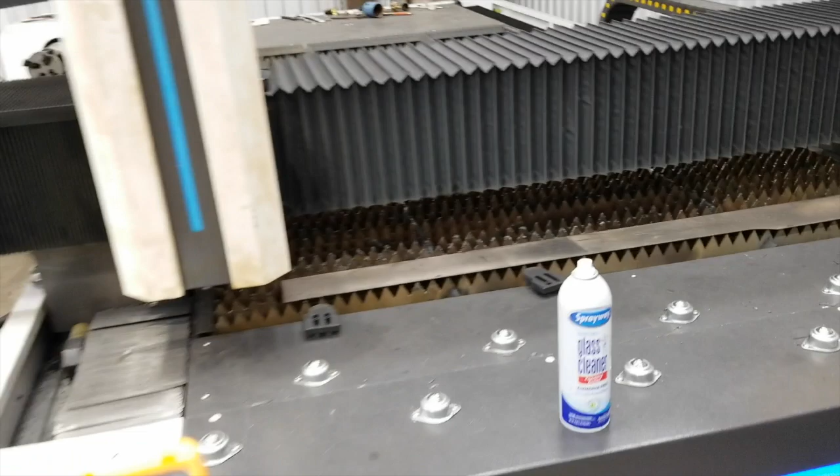All right, so for this part of the video, we're going to walk you through everything about the remote and what the buttons are and what they do and how to use them. For the purposes of this, I'm not doing a screen capture because I don't have screen capture software on this, and I do not want to take a chance on causing any kind of issues.

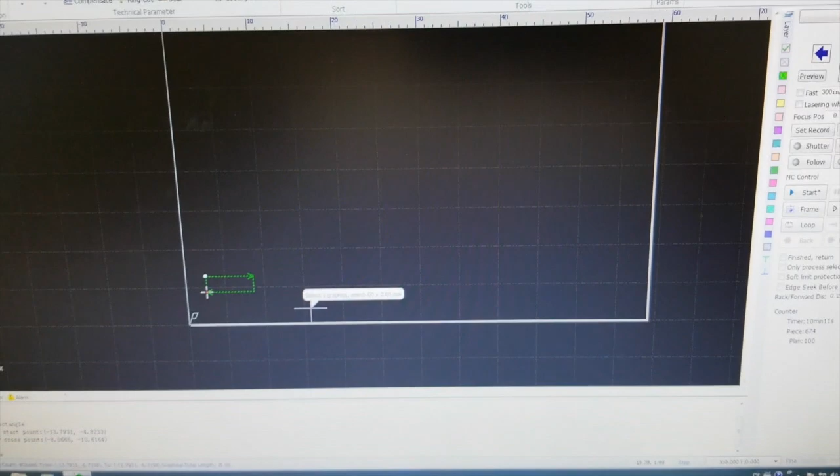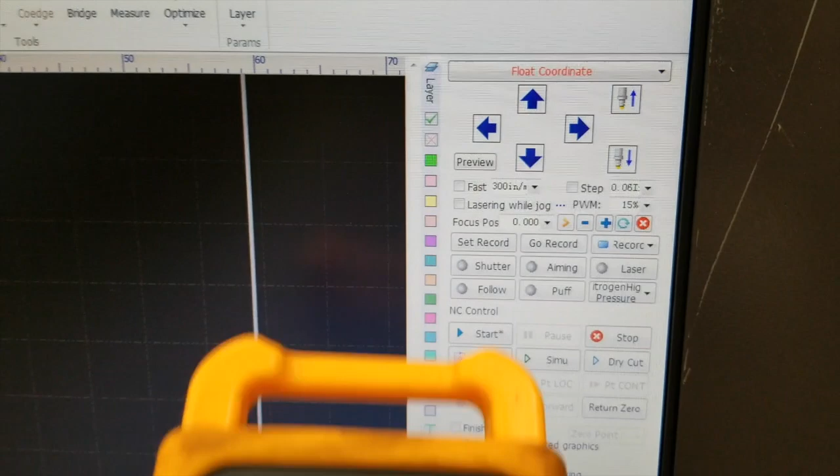But for more lengthy videos where we're showing a lot of the use of the software, it will be done on a simulation via screen capture, so you get a better look at it. I just wanted to show you that on the screen here, you've got this part of the screen, and a lot of the functions shown there are mirrored here. You can use the screen with the mouse, or you can use the remote to change a lot of this and do a lot of the navigation.

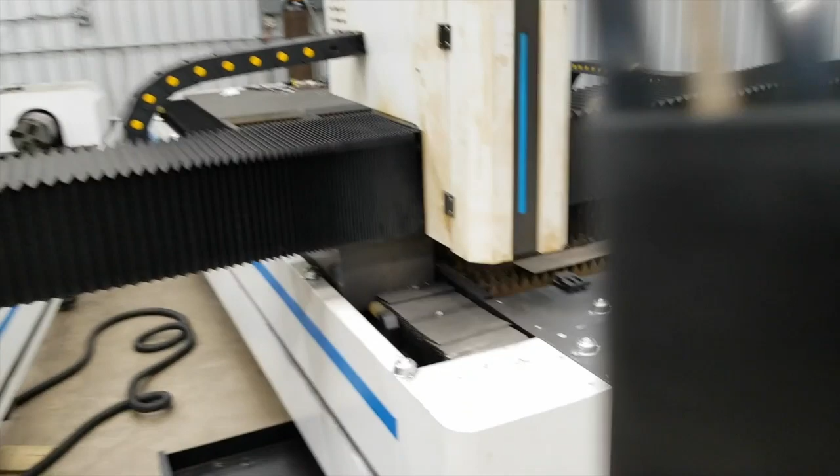For the purposes of what we're doing here, I'm going to show you this little rectangle. It's just a 2x6 rectangle that we're going to cut out of some scrap. To do that, I'm just going to walk you through the remote and what to look for and how to use it.

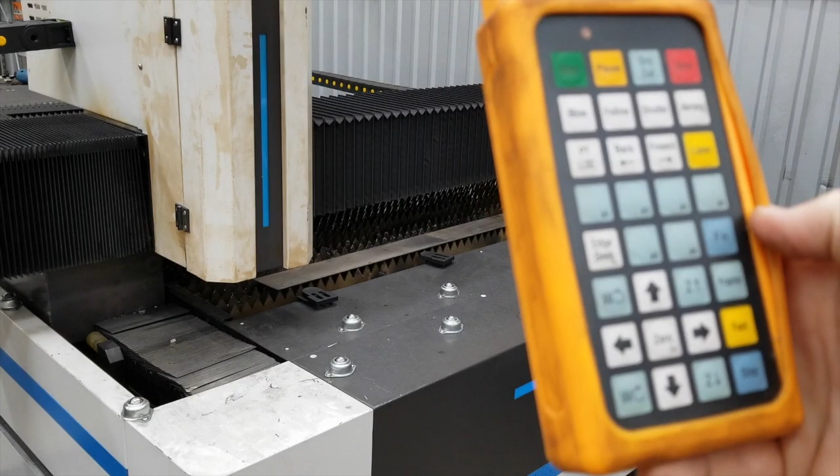Okay, so here we've got the remote, and these buttons right here are going to be the jog navigation buttons, and the orientation is going to be when you're standing at the front of your machine, you want to be facing the machine, and everything will line up from there. So this button here will go back, and this button will go to the right, and so forth. That's pretty easy to do.

The actual speed that it's jogging at is controllable on that panel I just showed you. You can change how fast it's jogging at. Now the jog itself, you have 3 different speeds you can jog at. So this one here would be the normal jog speed.

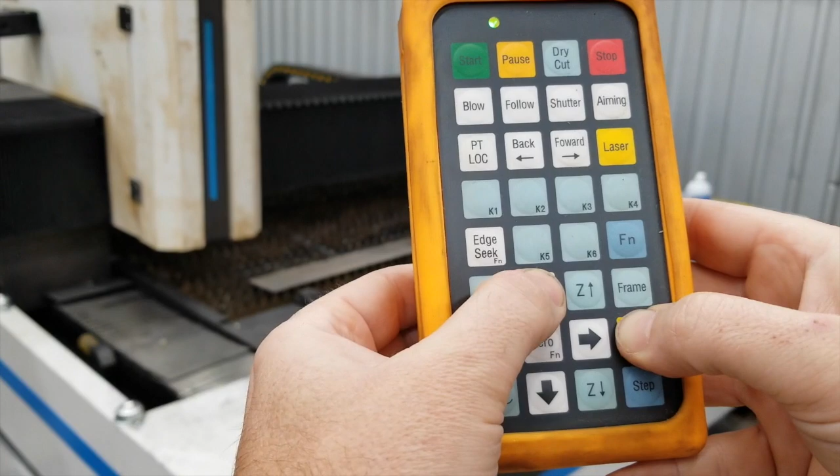As you get close to where you want to jog it to, that's going to be the speed you want to use. If you wanted to jog this thing all the way back to the back of the machine for whatever reason, you would hold down the fast, and while you have that held down, you see the lights on there. Then you jog from there. So if you see this, see how much faster it goes, and right and left.

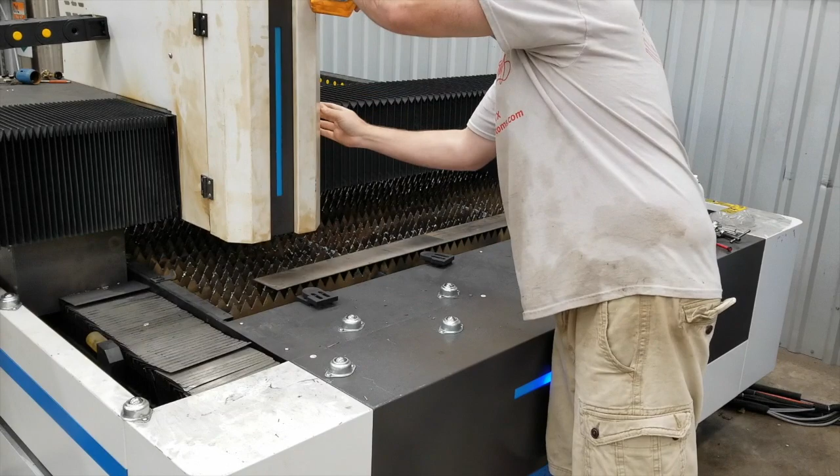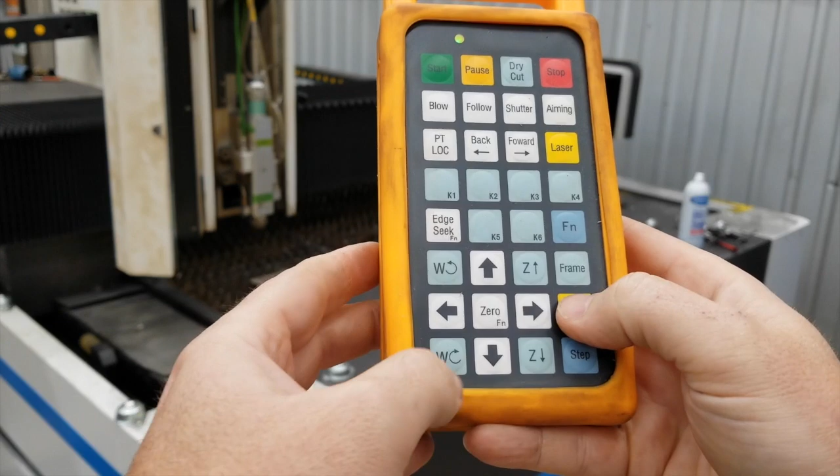Also on the screen you see Z up and Z down. Let me open the cabinet here so you can see that. So it's the same with this. You can see it's slow jogging down. And if we hold down the fast and Z down, see it comes down a lot faster.

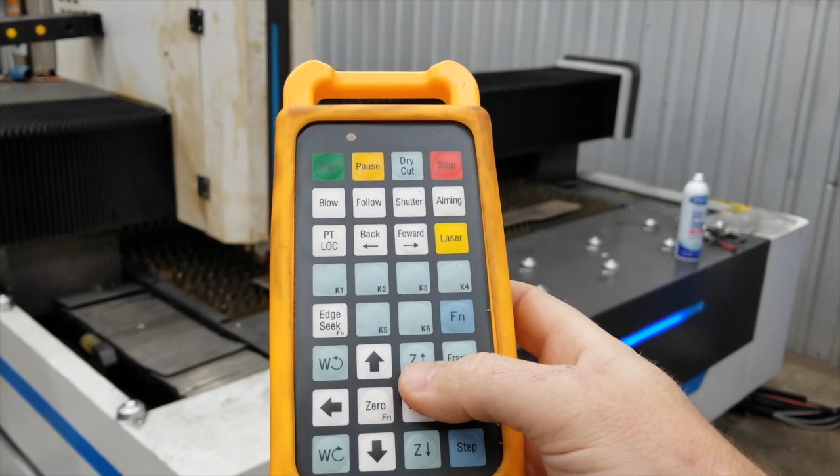So a common button that I use all the time is this follow button right here. What that does is drops the torch down, or the laser head down, and turns on THC, so that it's actually at the cut height.

So if you hit the follow button, I'm going to jog the Z back up real quick just so you get the full look at it. So if you hit the follow button, and if you saw that, and if you hit the follow button again. Sorry, this camera will focus on one thing at a time, so if I have this in focus, whatever else is blurred, and if you remove that, the blur goes away on that. Just bear with me.

But this follow, once you bring that down, the height sensing is actually on now. If you notice, if I move this plate around, you can see the head moving up and down with it. And if you touch it to it and just do it real fast to get it to touch it, it'll error out and retract all the way. But no problem on that.

So like when you're getting ready to cut something, you want to bring your follow button down, and now you can jog to the X0, Y0 position, which on this machine is going to be in this left corner. So from here, if you want to jog to the corner to get ready to cut something, you can just jog until you're there. So we're pretty close in the corner there now.

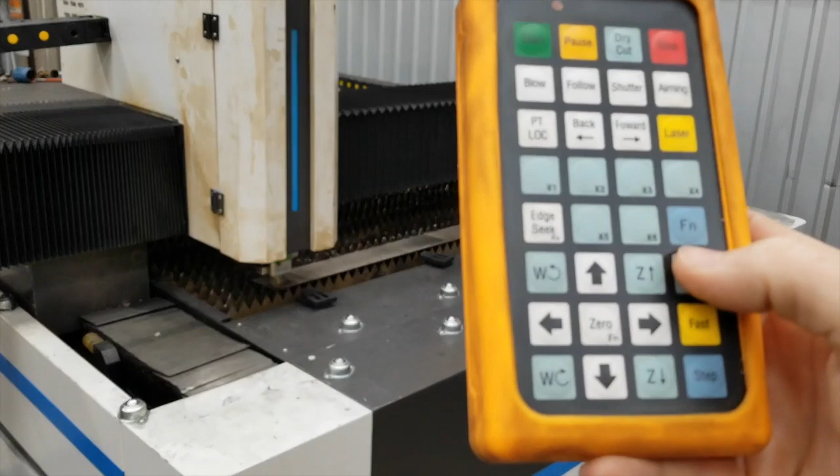And so from there, when you're ready to cut, you can frame out the cut to see if it's going to fit where you want it to fit. Now what I do with that is raise up the Z just a tiny bit and then hit the frame button.

Because if you accidentally frame it with the THC on, in other words, if the THC is riding up and down with the sheet and you run it off the edge of the sheet, it will drag and the THC is going to dip down as soon as it goes off the edge. So you want to have this up a little bit. When you raise that up, it turns off THC. So we'll hit frame, and it's framing out our cut.

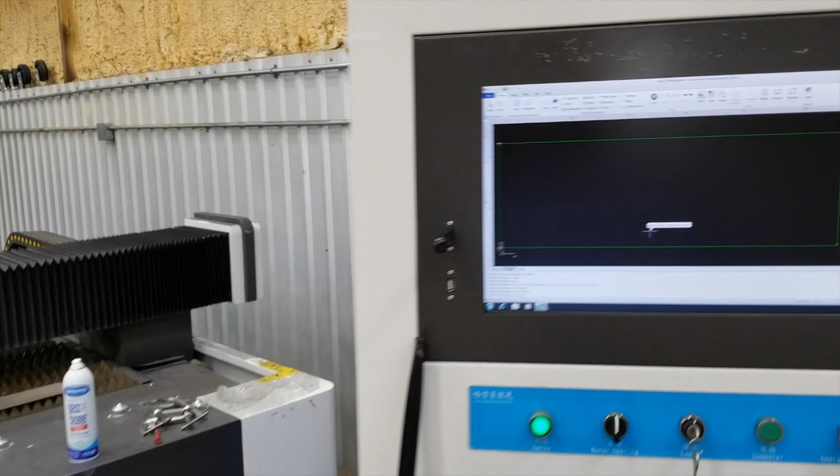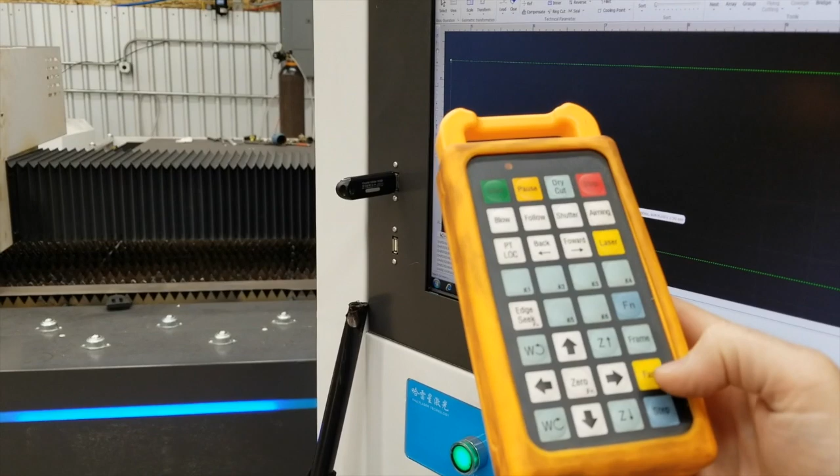I'm going to show you on the screen here again, trying to get all of it in camera. So this is what we're looking at on the screen. You can see the crosshairs are down there in the bottom left-hand corner. And if I frame this out, you'll notice on the screen it'll frame it as well. So it's showing you what you're cutting, and you know where you're at on the table.

And on this, if you zoom out using the scroll wheel on the mouse, you can see the drawing board or the sheet in white is the cutting area, and you can see kind of where we are on the cutting area. That's assuming that you've homed the machine. I'll show you the homing process in a different video. For now, I just want to show you about the remote control.

Okay, these buttons here are for the rotary tube cutter. So if your machine's got a rotary tube cutter, and it's not active in the plate cutting software, those don't really do anything at this point.

So that kind of covers everything down in this area. Now up here, there's other buttons that we can look at. So I'm going to go over here and turn the gas on. I don't have it on right now, but I'm going to go turn it on.

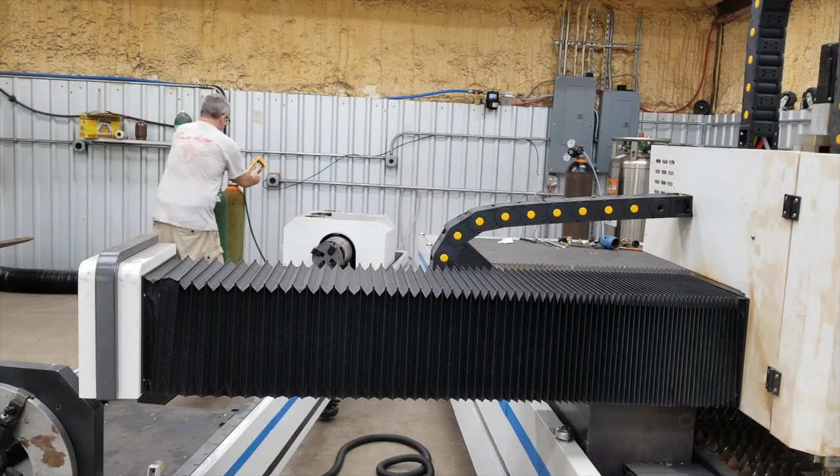So we have the gas on now. And the one thing you can do to verify that you have the gas on is if you see this blow button right there, that'll enable the solenoid, or activate the solenoid, at least on this machine, and verify that your gas is on and flowing. You hear that? And it's not a bad idea to purge it if you haven't had it on, that way you've got good airflow all the way through. All right, so that covers the blow button.

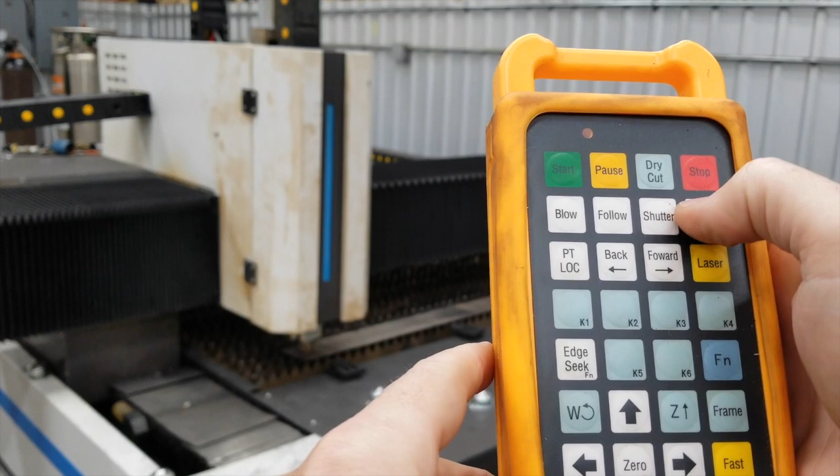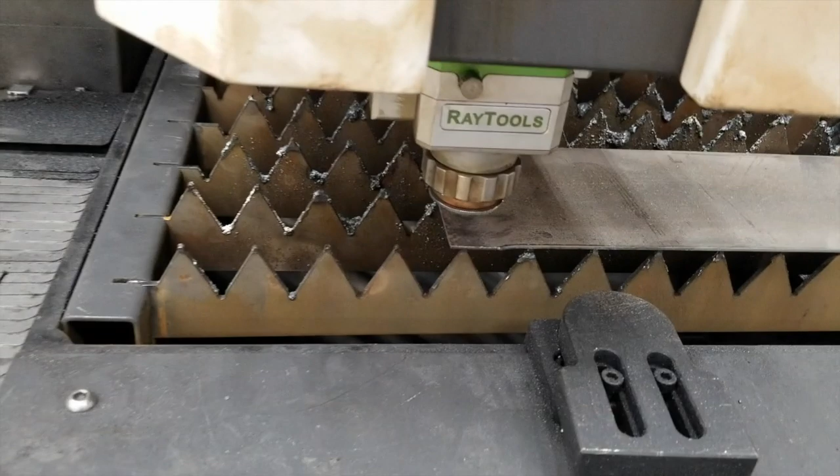We talked about the follow button and the shutter button. Let me show you a little about that. I'm going to bring you in there close so we can see this better. When you boot the machine up, the shutter is off by default. You can always tell when the shutter is on. Let me move this over a little bit where we can see.

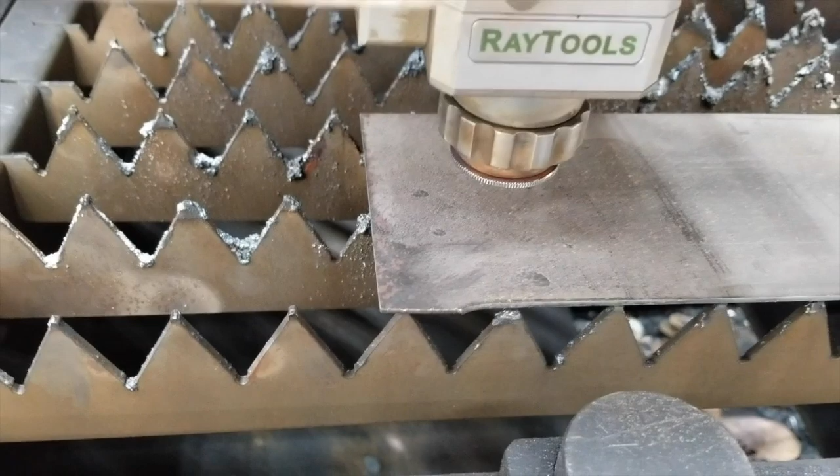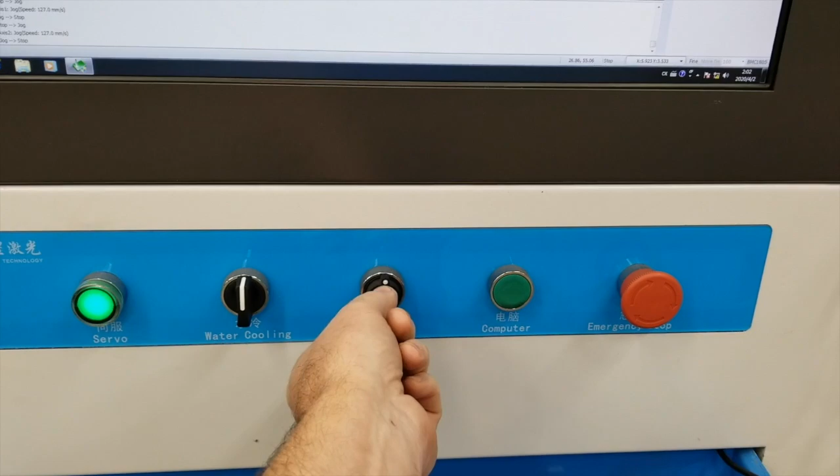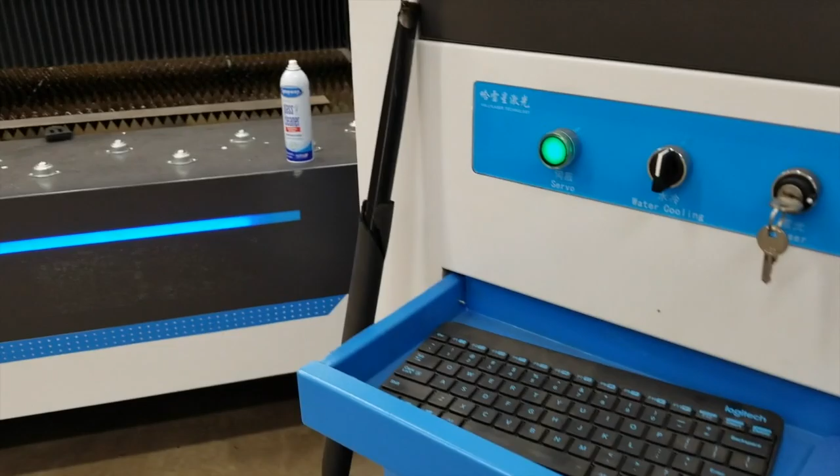All right, I have the water chiller off and the laser off. So without the laser on, you won't get the shutter. So we're going to turn the laser on, and in this machine here, the laser's down there, and you see I just powered it on. We got the green light, so we should have a shutter button. If you ever don't have your shutter light showing there, like I just tried to show you, you can see it's on there now. And this is a toggle, so when this is on, it will not cut.

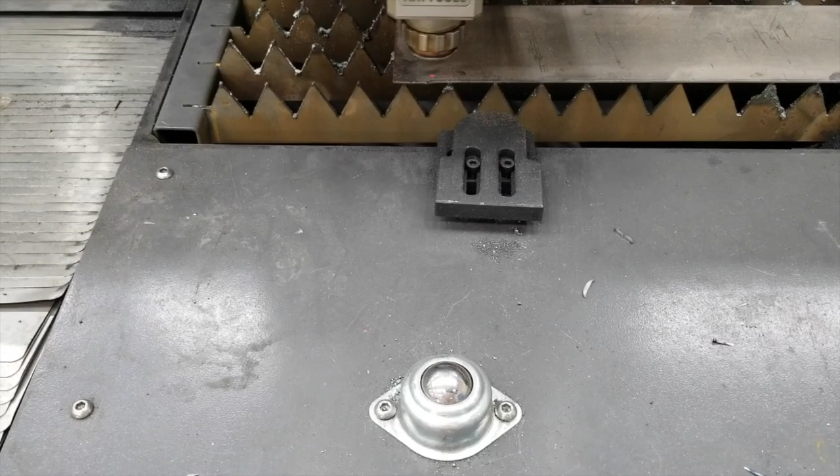But you get that guide there, laser pointer that's dead in the center, that you can use to really dial in where you have it positioned, and use your step and all that. If you wanted to get it dead in the corner, you could use your step that I just showed you a minute ago to get it there.

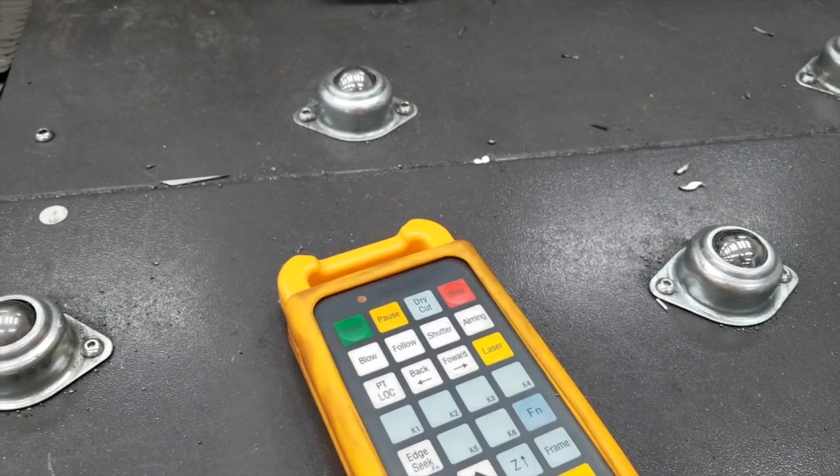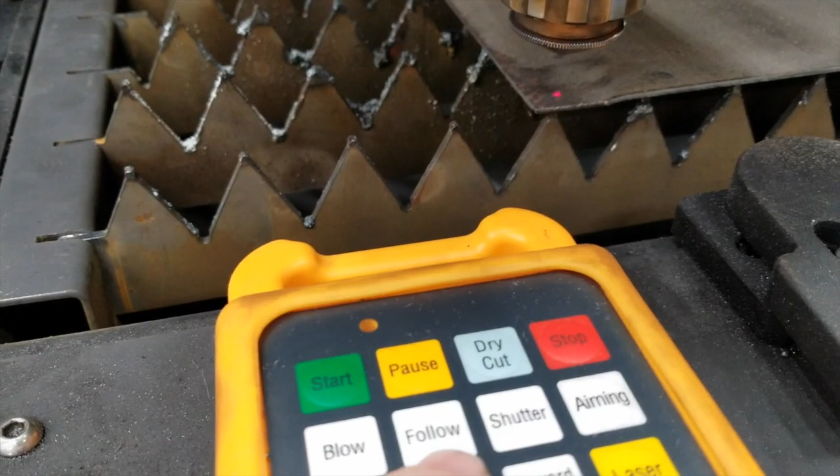Before you get ready to cut, you want to hit the shutter button. Let me get it really close so you can see both of them at the same time. So there's the shutter button, and if I turn that off, now it'll actually cut. If you try to cut with it on, well, we'll just go ahead and start it so you can see what happens.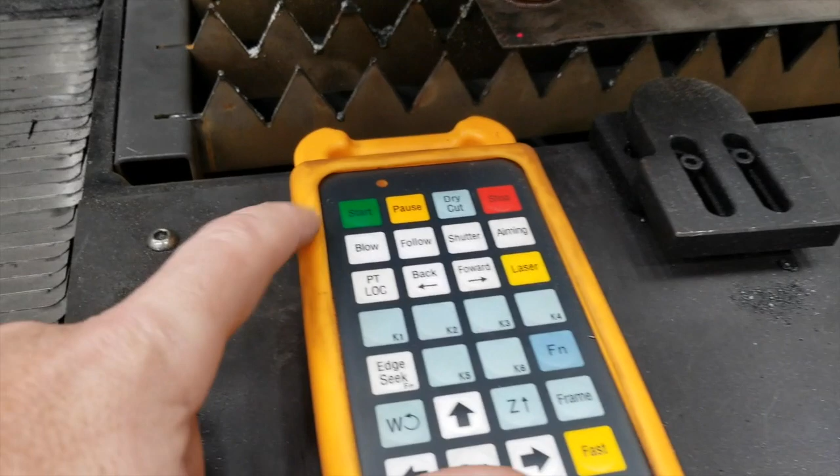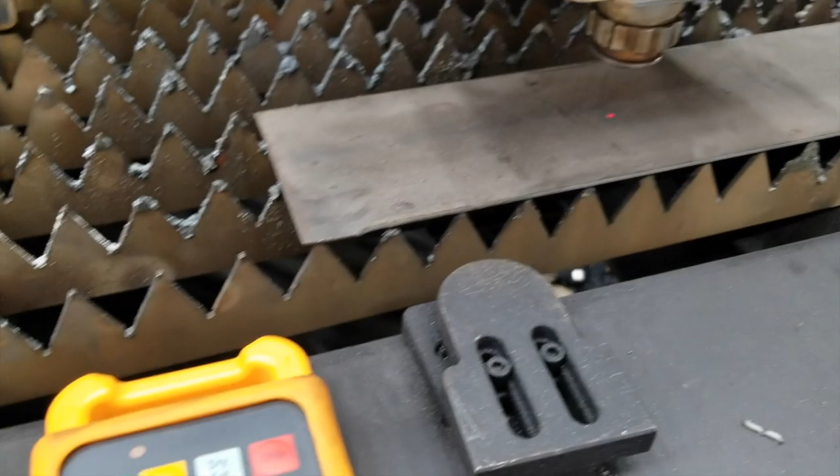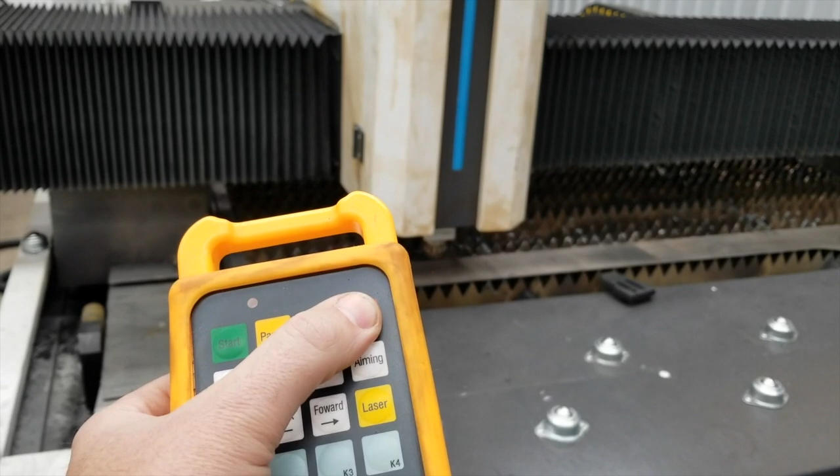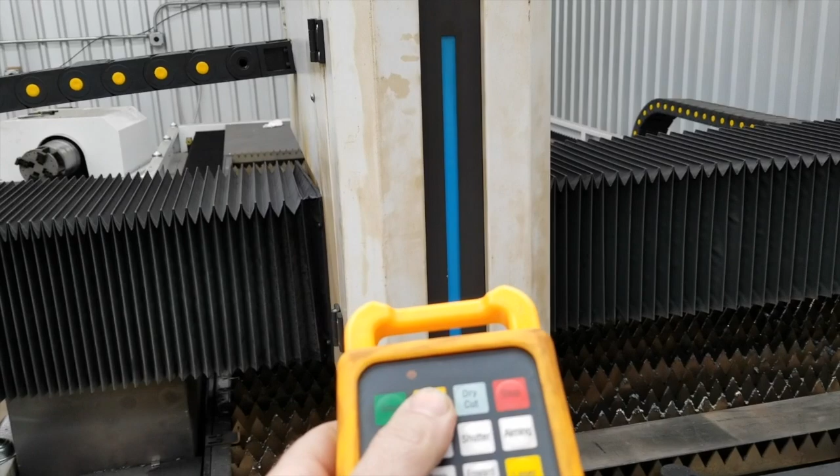You hear the gas running, but no actual cutting is happening. So we're just going to pause this, which lets us look at the pause command as well. When you're in the middle of a cut, for any reason—whether you've got a tip up or something's not cutting right—you never want to hit stop. If you hit stop, that will end the program, and trying to recover after that is pretty tricky. I've accidentally hit stop many times in the middle of a program and wasn't able to recover. So you want to hit pause like I did just there.

If you notice on the screen here, it's paused right in the middle of it, and you see the resume button is lit up. In this case, you could hit resume, or just hit start again on the remote, and it'll pick right up. So if you clear your tip up, or clear an error message, then hit resume on the screen, or start here, to restart it. You see it's going again—we're running slow because I didn't change the settings, it's going way too slow for this thickness of material.

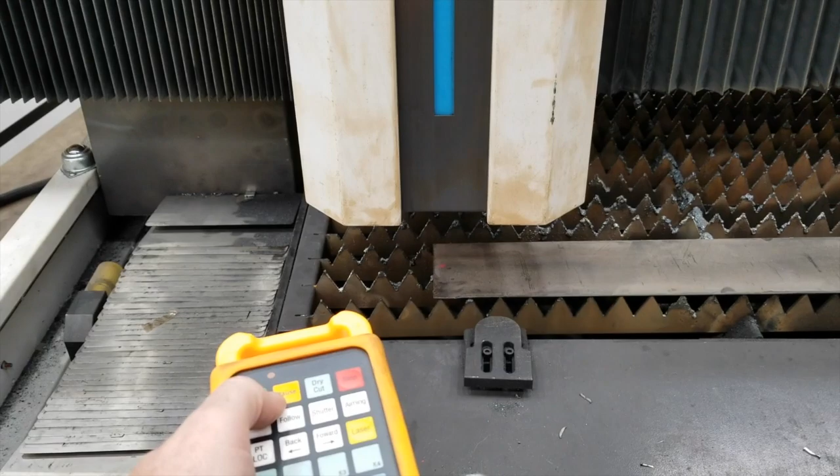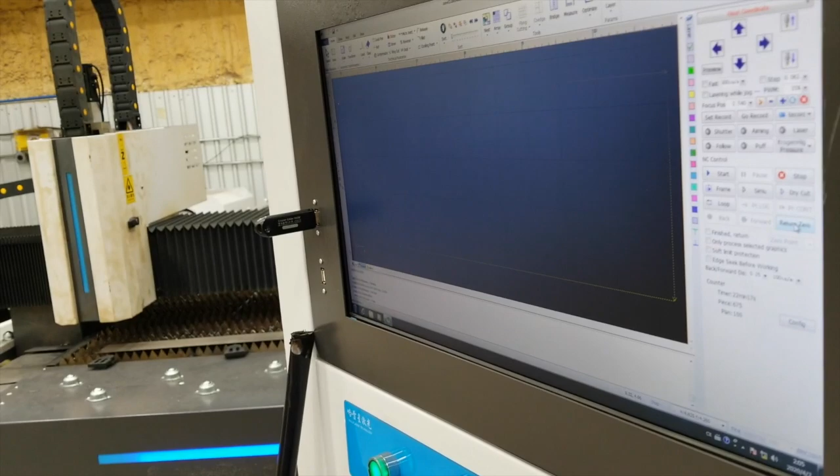I didn't actually set it for the right material thickness, but I'm just showing you the idea. Once you get that cut, you can come to the screen here and return it back to 0. Let me show you that, trying to get both of them in the screen at the same time. So we're going to hit return to 0—and now it's back at the 0 point.

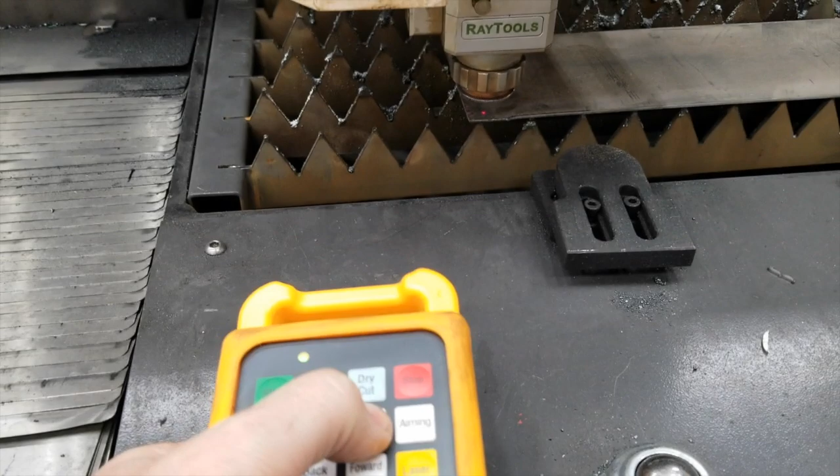Now, if I hit the follow button to bring that down and then raise it up a little so we can see what's happening, you can see that the shutter button is on. So if you wanted to cut for sure, once you get it aligned, you want to hit the shutter button like I just did, and you'll notice the light's off. Shutter on, shutter off—you'll get used to it. The first few times you cut, you're going to cut with the shutter on and think, dang it. Just return it back to 0, turn the shutter off, and hit the button.

Let me give you a little preview here, although I'm going to show this in a lot more detail. That was, I think, quarter inch plate I cut last—you can see a very slow cut speed there.

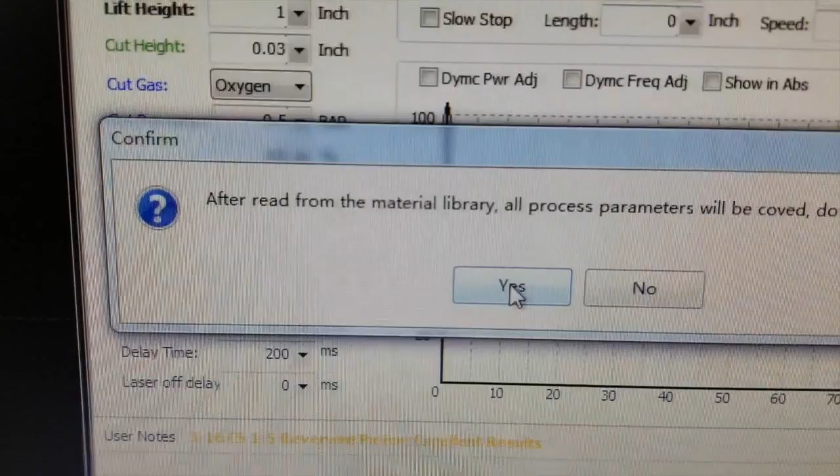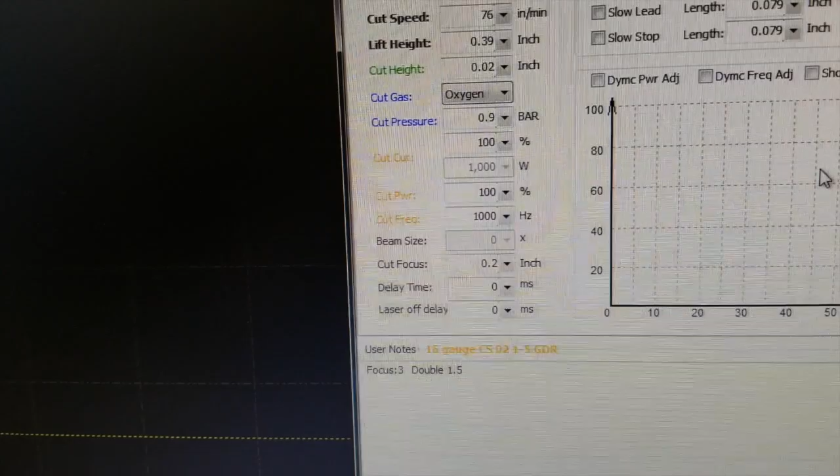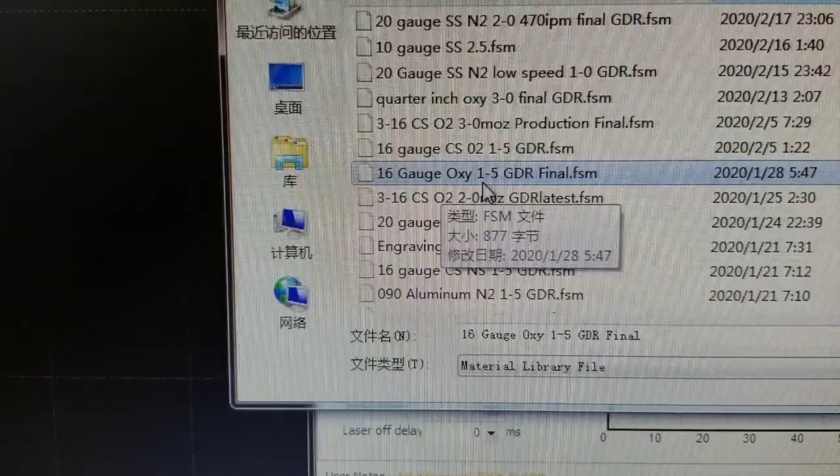To load in a different set of parameters, you want to go to the open folder. It's going to give you a message warning that it's going to override everything. This is some 16 gauge cold roll that we're going to cut with oxygen, so I'm going to scroll down and find my file for that. I've got a couple of different ones—let's take a look at this one. Yeah, that's not the one; I accidentally overwrote that one at one point. So let's go down and use the one just below it. 16 gauge oxygen 1-5 means a 1.5 tip, and I'm going to open that one. So that's the one we want to cut with, 220 inches a minute.

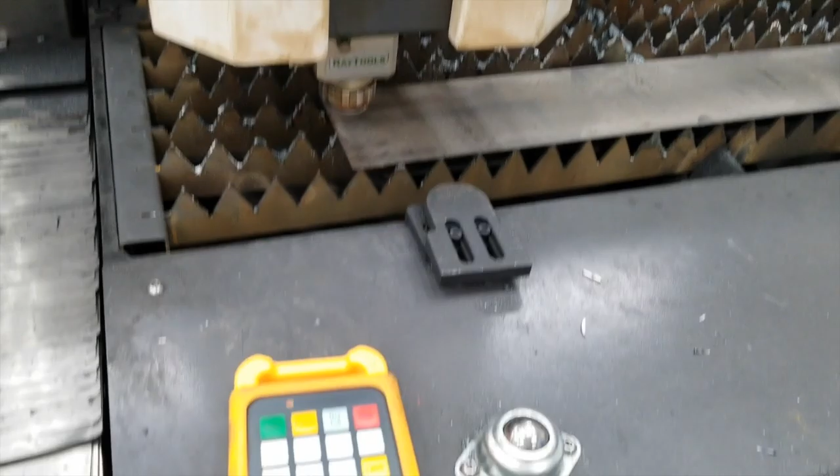Now let me show you this—you can do a dry cut here where you just hit that button and it'll go through the motions of the actual cut, not just frame it out. In this case, the frame and the dry cut are going to be the same because we just have a rectangle, but if you had an actual drawing, it'll go through the motions of cutting your drawing. We'll hit dry cut just to show you—so now that's actually going at the real cutting speed we have set up. And then for the frame, let's return it to 0.

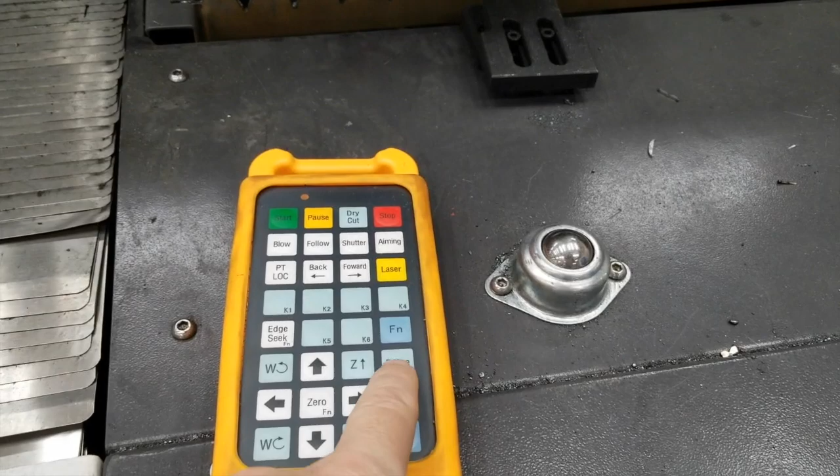If you notice, the frame is going to go a lot faster because it's framing it at the fast jog speed. Okay, so that's the difference there.

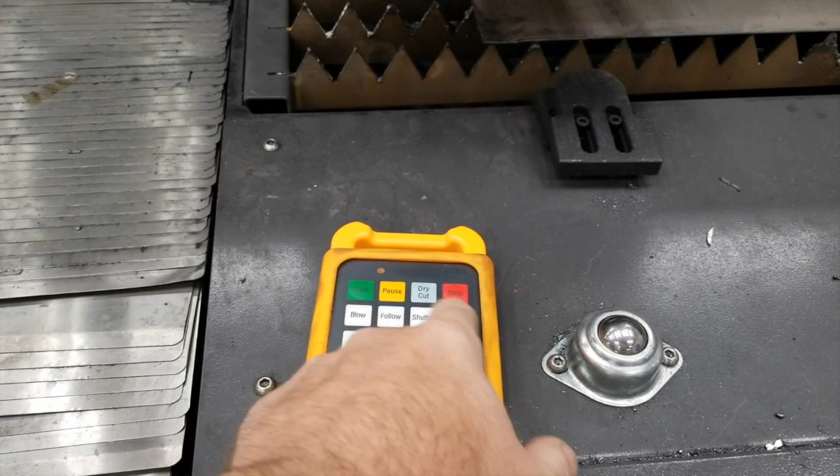So we've covered that. We've covered blow, follow, shutter. Aiming I've never used.

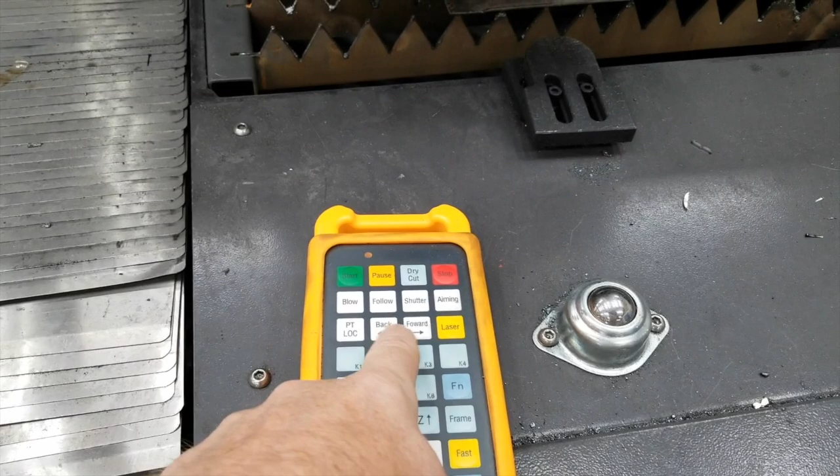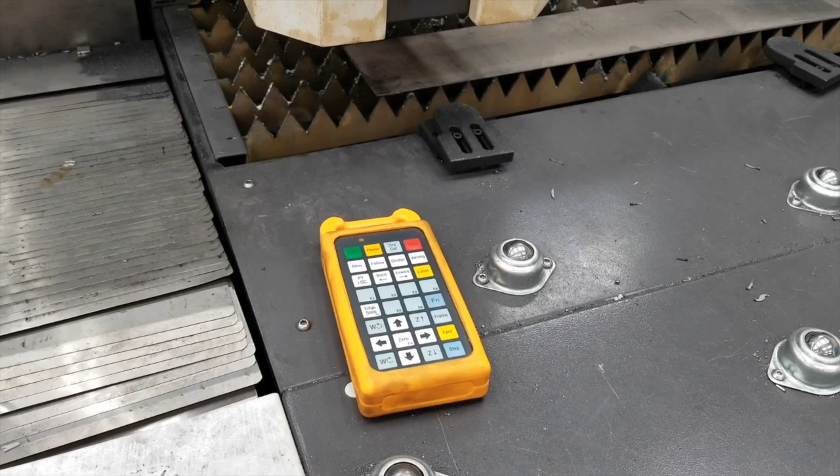Now, backwards and forwards will, if you're in the middle of a cut, let's just cut it, and then let me pause it in the middle and show you the backward and forward, and also show you the pause, mid cut there on it.

All right, so now we're going to cut that rectangle out. I'm going to hit the start button here, and in the middle of it, I'm going to stop it by hitting the pause button, and then show you how to resume it and show you how to back up or whatever. So we're going to go ahead and hit that, and we got the shutter off, so it should cut.

So I'm going to hit pause right there, and I'll take you in there close so we can take a look.

Now, when you pause, the only thing about that is you can do lead-ins and lead-outs, which we're going to cover in other videos. And if you pause the machine, you no longer, and you got to restart it, you're going to lose your cleanliness of the

lead-in, because it's not going to have a lead-in. It's just going to re-pierce right there where it left off. Now, granted, it's going to pierce into an opening that's already open, so that does help. But you'll notice a little blemish of it.

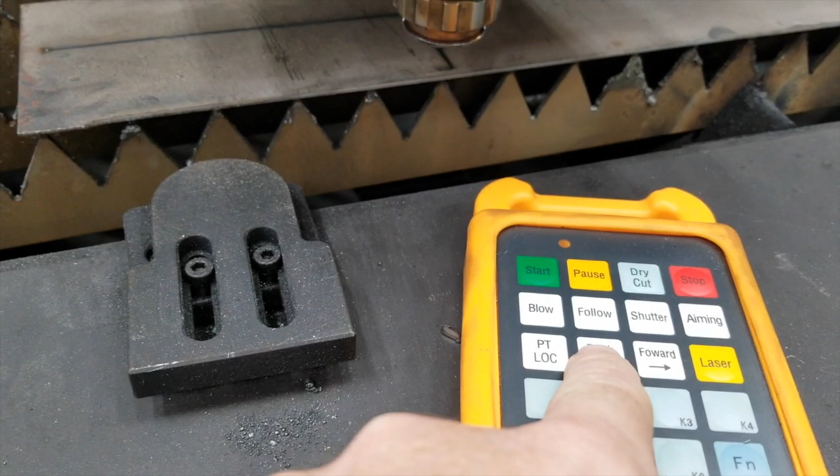So if it were to, for whatever reason, cut too far ahead, and you need to back it up a tiny bit, or even back it up to a previous feature, like a hole that didn't get cut out or whatever, that's where this back and forward come in here.

So if I hit back on it, you see it moved back a little bit, and if I hit forward, it'll take it there. And how far it's moving backwards and forward is controllable in the software. You can set that on the screen there.

So if I just wanted to back it up that far and have it restart right there, I just hit start again or resume on the screen. So we'll restart it and let it finish.

I should have micro jointed that, but you see we got a nice cut there. Again, 16 cold rolled using oxygen. You're going to get a nicer cut with nitrogen on that material, but it does a nice job with oxygen as well.

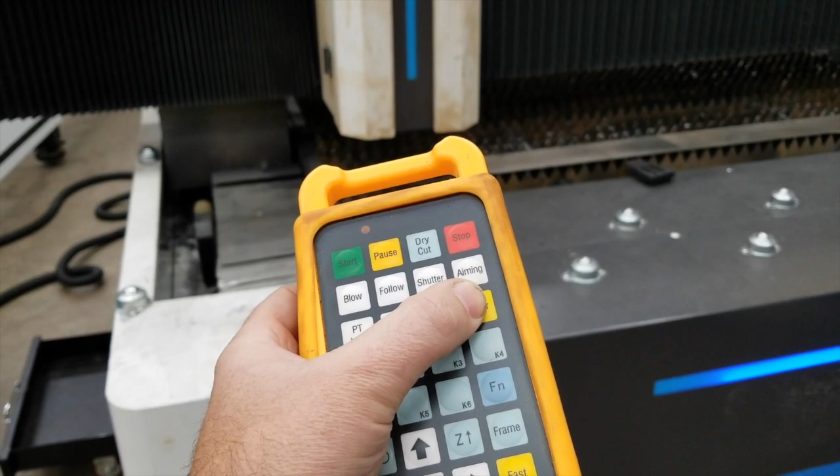So that is, I think I've shown you pretty much it. The laser button will actually fire the laser without the cutting gas, and I don't think you really need that on a regular basis, except for when you're doing a tape shot, which is where you do your alignment right here of the laser beam.

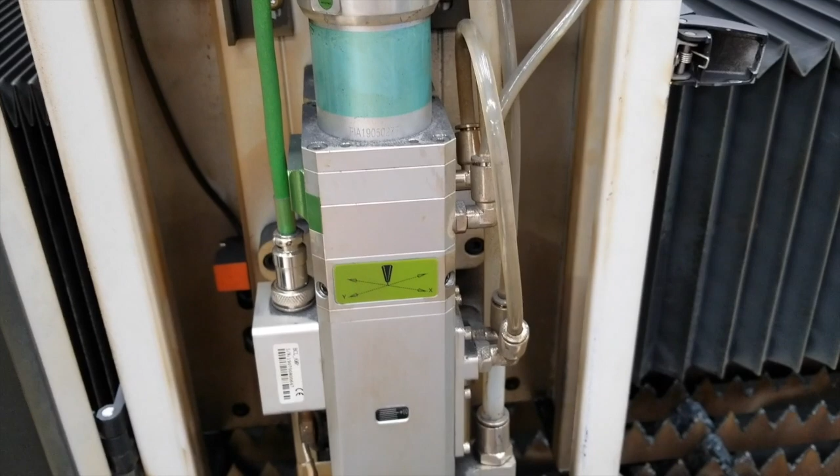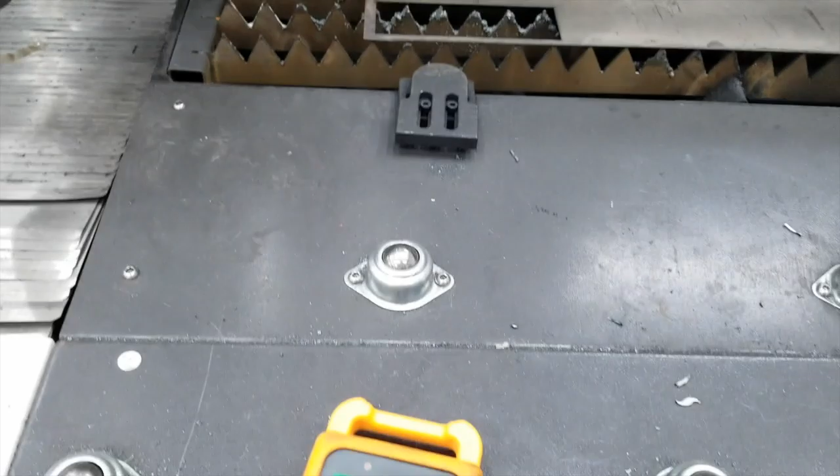So if your laser gets out of alignment and starts, you start having poor cut quality, you will place a piece of clear packing tape over the edge, and then you'll fire the laser button here, and it'll fire through the tape, and you'll see the imprint of the outside of the nozzle and where the laser actually shot through the tape. And if it's not dead centered, you'll use that.

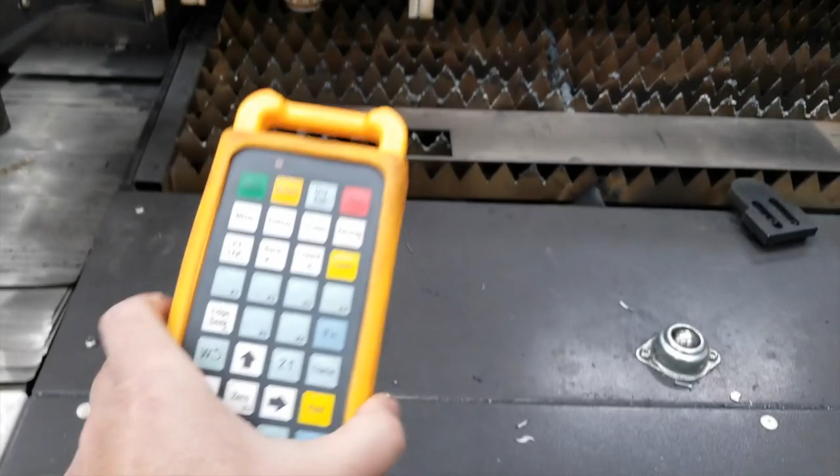So that's what that button is. Everything else I think we've talked about. And that covers everything on the remote.

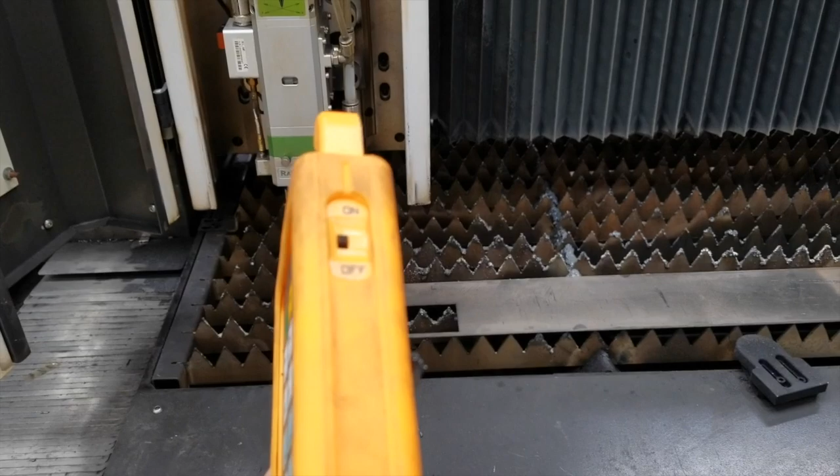The one thing here, it does have an on and off. And I've had this for 5 months now, and I've never turned it off. It's been on the whole time, and the batteries are still good in it. I've never had any issues with it.

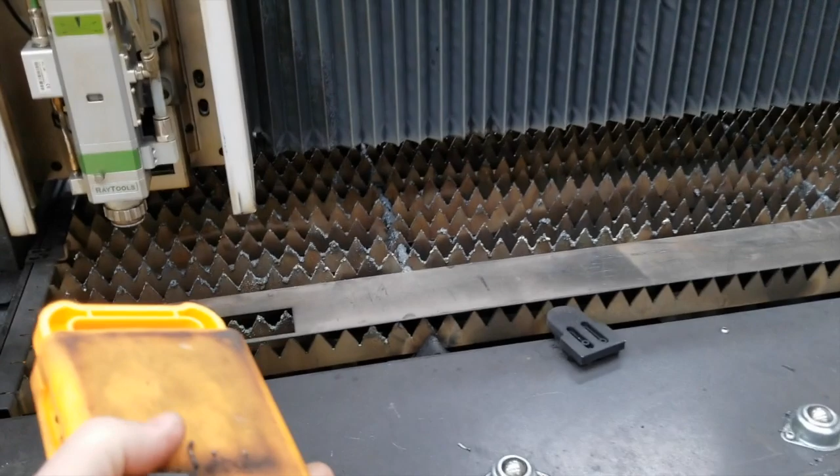It's also magnetic on the backside. You see it wants to collect a lot of stuff on it, but that's nice because you can stick it anywhere, if you want to park it right there and keep it there. So that will conclude this part of the video, and there is your overview of the remote.